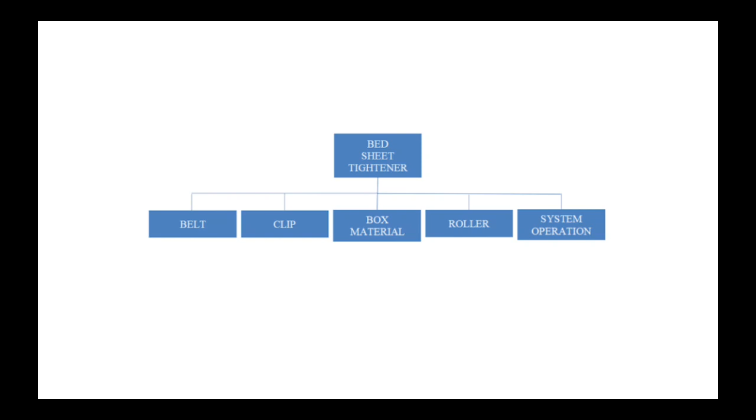At the end of this part, here is the decomposition chart of the features that I have listed. Now we're moving on to the third part of the presentation: the morphology chart, possible solution concept, and sketches.

In the morphology chart, I will explain more detail about the features from the previous part. So let's start with the belt material. My groupmate and I have decided to choose 3 types for every feature. For the belt material, we choose nylon, cotton, and elastic. These types of material are suitable to be a good belt or strap to pull the bedsheet.

For the second feature, the box material, we choose PVC, steel, and plastic. This is because we want to provide a product that is durable for any kind of situation. This way, the product won't be easily broken.

And the next feature is the roller. We choose the roller material as steel, plastic, and PVC. This is because the roller is the main feature that rolls the strap to tighten the bedsheets.

For sure, the roller needs to be a hard material so that it won't break when it rolls the strap. For the clip, we choose stainless steel, PVC, and plastic to make sure it won't come off from the bed sheets. For the system operation, we decided for the product to operate automatically, manually, and semi-auto. This will be convenient and help the user tighten their bed sheet.

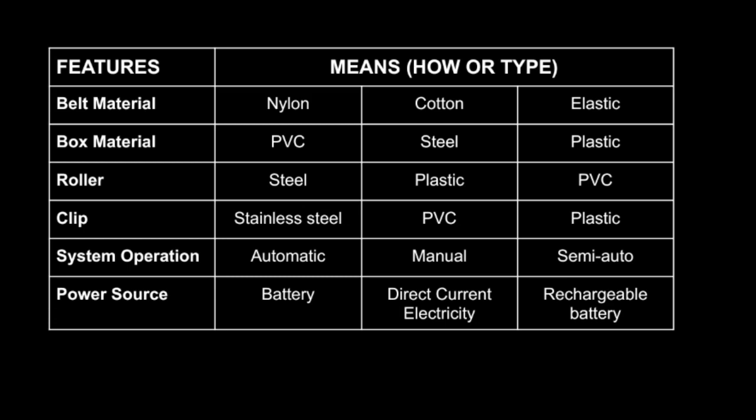The last feature is the power source of the product. The power source could be from a normal battery, a rechargeable battery, or direct current from the wall plug. That's all from me for the second and third part of the presentation.

Now we will continue with the sketches from my groupmates.

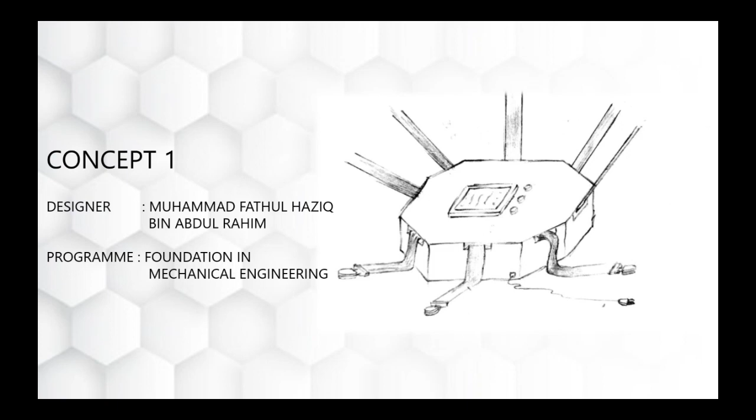Hi, my name is Muhammad Fathul Haziq bin Abdul Rahim, taking foundation in mechanical engineering. In this part I will explain a little bit about my design. After applying creative thinking skill, I could explain that my design is like futuristic technology.

The material I use is elastic for the belt, and for the box material I use PVC because it is lighter than steel. For the roller, I use steel because it is really hard to break, so the cost of maintenance can be reduced. For the clip, I use stainless steel because it is more strong to clip to the bed sheet, so users don't need to worry if the clip disconnects from the bed sheet.

For the system operation, I use automatic. The user just needs to input the timer for the operation time. And lastly, for the power source, I use direct current electricity because it can provide 24 hours of electricity.

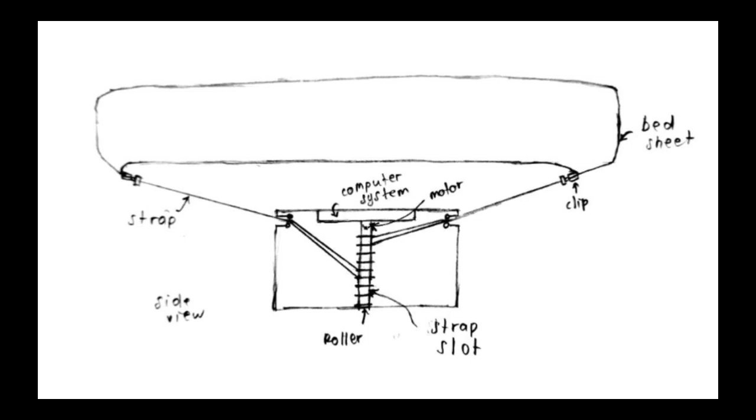This is how the automatic tightener works. First, the computer system will save the data such as the timer for operation time. Then the computer system will send the data to the motor, and the motor will spin during the timer. When the motor spins, the strap will be rolled into the roller, so the belt will pull the bed sheet.

This part I will explain more specifically about the system. This is from the upper view. From the upper view, the bed will be divided into 8 sections. Every section has its own strap slot to make the pulling process easier. In the system view, we can see that the roller will spin and the bed sheet will come into the roller. So the roller is also divided into 8 sections for their own strap slot.

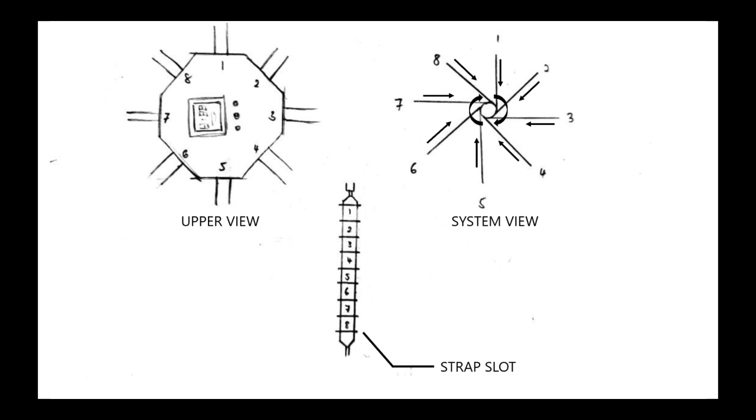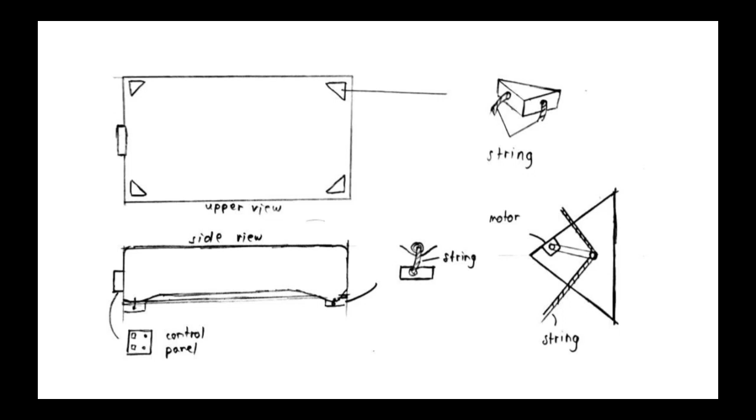This design can be used for beds that don't have a bed fitted sheet.

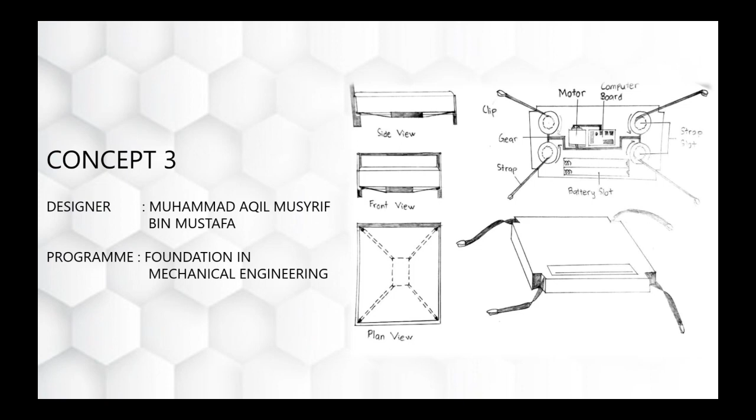This is the third concept of our main product. As you can see here, I have provided some views: a side view, front view, and a plan view. As you can see from each view, this concept is placed under the bed.

Now I will explain how to use the product and how it works. First, you put the bed sheet on the bed, then clip the edge of the bed sheet with a clip from this machine and place it under the bed. Once that's done, the machine is ready to be used. This machine comes with a remote control that you can use to turn the machine on and off.

You can control the machine either to tighten or to release the bed sheet when you want to change it or clean it. The process of the machine is simple. When the user turns on the machine, the computer board will be ready to accept any order from the user.

The computer board controls the motor inside the product, whether to pull or release. For example, when the user turns on the machine and pushes the pull button, the computer board will control the motor, and the motor will move the gear that pulls the strap into the strap slot. If the user turns off the machine, it will still hold the sheets, but it will slowly release it.

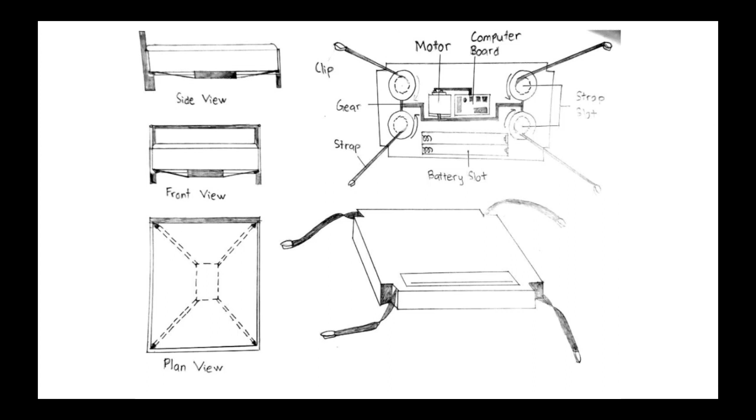Now is for concept 4. You can see it from side view, plan view, and the box. The belt material for this concept is cotton, and the box material is built from PVC, and the roller is from steel, but it is not a roller at all, it is using a compressor.

Then for the clip, using stainless steel to clip the sheet. The system operation is semi-auto, which means we need to push the button, so it is semi-auto, and the power source is using battery.

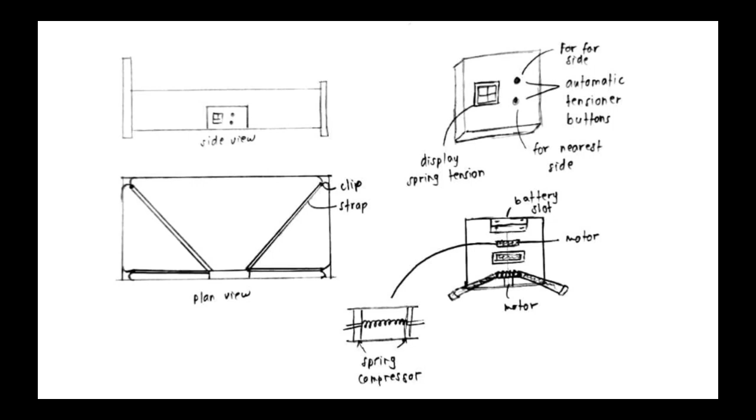Compared to the other concepts, concept number 1 has the advantage on the long lasting criteria due to its power source being direct current electricity rather than battery. The user needs to change the battery each time it's empty. Other than that, it's also cost effective due to its material, which is low cost material. Besides that, it's also much more convenient compared to the other concepts.

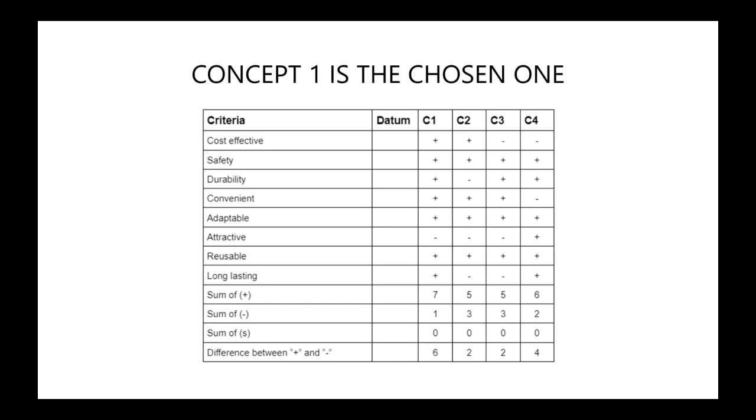So we can see that from all of the concepts, concept number 1 is the best concept compared to the others, and that's why we choose concept number 1 for our project.

Description of the chosen concept. For design, it is very ideal, and the design is easy to use for every type of bed. So this can attract more people to purchase this product and could be the family product worldwide.

Then for the construction of the product, it uses an automatic system and rechargeable batteries, so this product can last longer and be much more effective. This product's roller is made of steel, so its sustainability will be higher, and the clip is made by stainless steel and doesn't rust in a short period of time.

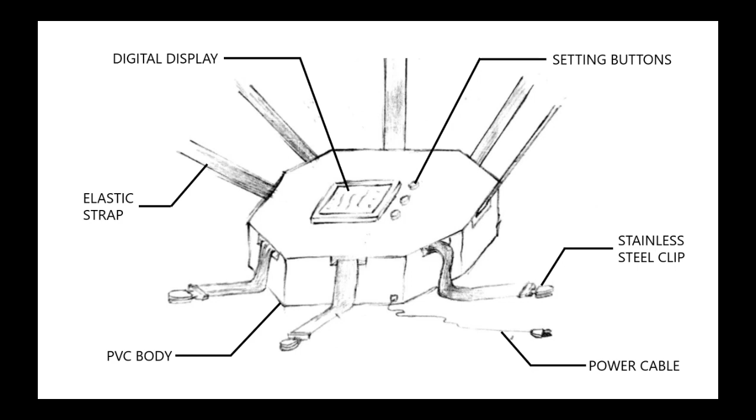For the belt material, nylon or cotton is used to make sure the belt doesn't scratch or damage the belt edge. The box material usually uses plastic or PVC because these materials are strong but light enough to be changed or assembled for this product.